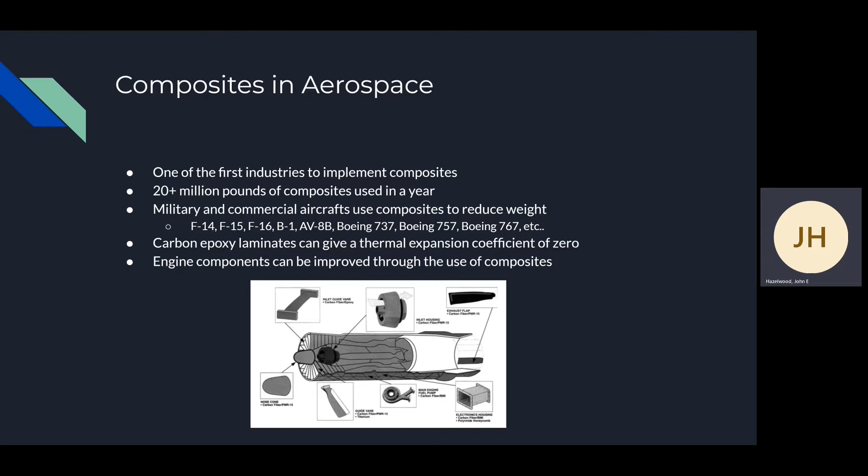So the performance requirements for aerospace parts include reducing the weight, improving the thermal and dimensional stability. So lower weights in these parts can reduce the lift necessary, so engines can be more fuel efficient and produce less emissions. Parts are also expected to withstand high temperature and pressure fluctuations, so high thermal stability is necessary. Additionally, high dimensional stability is necessary due to the conditions parts have to withstand. Improvements here can improve the reliability and safety of aircrafts.

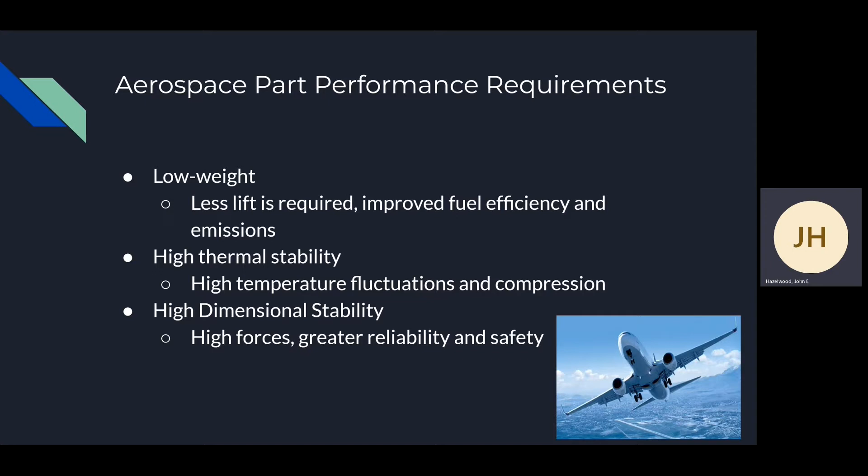The advantages of composites include making production easier, making it behave more consistently, and improving the strength to weight ratio. Parts manufactured for aerospace applications can often be complex and difficult to machine when working with metals, but manufacturing techniques available to the production of composites can make this much easier. Additionally, composites can be created to have a higher stiffness, which will produce way more consistent behavior in these parts, which is crucial in this industry. Finally, the improved strength to weight ratio gives aircrafts a much better fuel efficiency and reduced emissions.

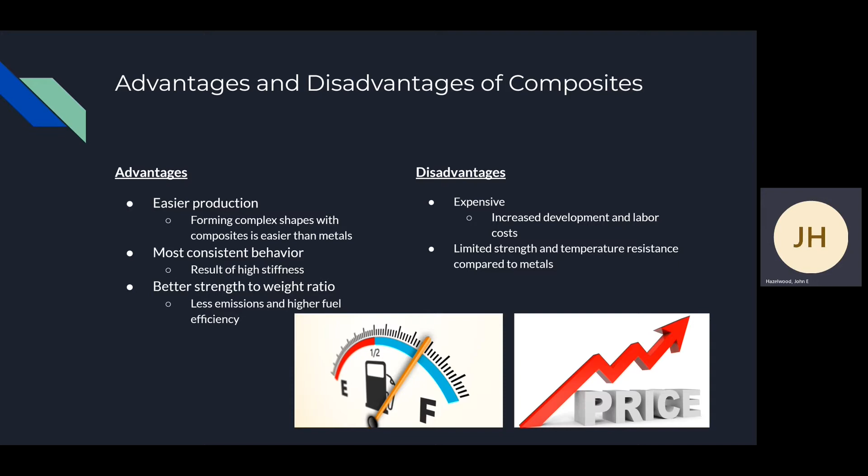On the other hand, however, composites can be more expensive and sometimes not perform as well as metals. Composites are generally more labor intensive, and for high performance parts, they can significantly increase the cost of manufacturing. Additionally, composites are unlikely to possess the same strength and temperature resistance that metals typically offer.

Ceramic matrix composites, often called CMCs, appear poised to be the next big development in jet engine materials. These materials are already in use in modern military engines, most notably in the exhaust nozzles of the F-135 on the F-35 Lightning II. Major manufacturers GE, Rolls-Royce, and Pratt & Whitney have all invested in research and manufacturing of these materials. CMCs provide great benefits and heat resistance relative to metal alloys, as well as weight, coming in at a third of the weight of most metals for the same part.

Without the need for air cooling paths within the engine and reduced rotating mass, as seen with GE's prototype CMC blades in the second image here, much more freedom is granted for aerodynamics and design to improve efficiency. Furthermore, these parts need less investment in tooling to lay up, helping maintain costs compared to alloy counterparts.

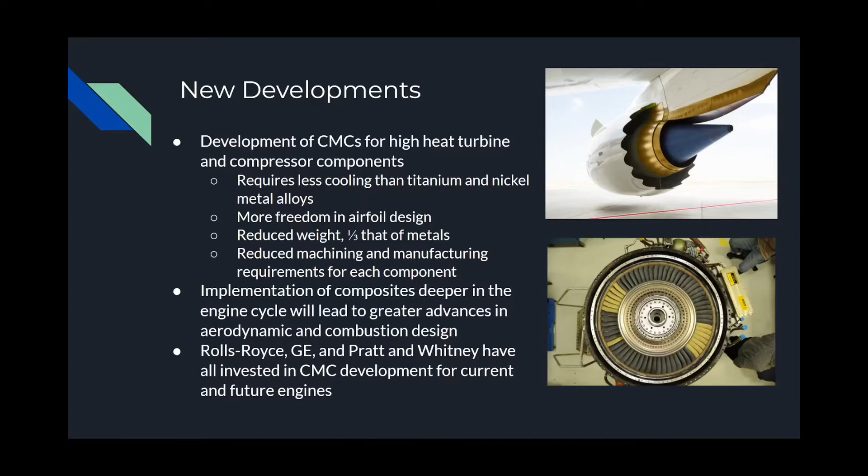New designs for composite aircraft engines are always in the works, and a few concepts that heavily leverage composites are discussed here. Rolls-Royce's UltraFan is a new generation of wide-body engine from the supplier. It will be their first to utilize composite fan blades, and it uses the greatly reduced mass, 370 kilograms per engine, and moment of inertia of these spinning blades to create the largest fan of any jet engine in the world. 140 inches in diameter is 6 inches larger than the GE 9X, which is GE's current largest engine in production.

Furthermore, as discussed previously, it uses extensive CMCs in its core to improve efficiency. Another new design concept comes from GE and Safran with their open fan engine. GE was the first to develop composite fan blades for a jet engine when it initially explored this concept in 1985, and it's seeking to bring back the design for modern materials to improve the efficiency as seen in initial testing. A 20% improvement in efficiency was seen with the original design, and GE aims to improve on this in its second iteration. As pictured here, this adds stators and a new rotor design to the already fleshed out open fan system that they've been looking at, all of which will be composite materials.

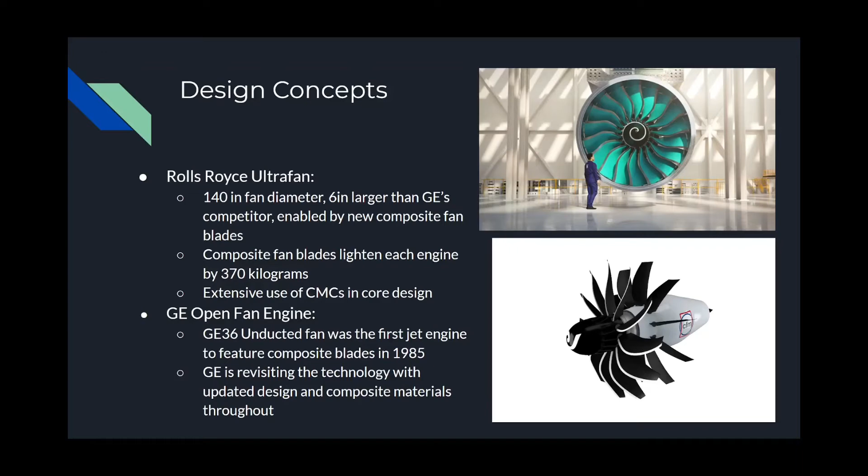The market for composite engines has been rapidly growing in the past few years, with nearly every new engine on the market featuring some use of composites throughout the design, and many making large composite components like fan blades a feature. This is because of the way the airline industry operates. Fuel costs are huge for carriers, and bringing down those fuel costs with lighter and more efficient engines is nearly always worth the added cost in procurement and maintenance. Fuel is always getting more expensive, so airlines will continue to seek these ever more efficient engines.

This is seen in the order numbers for the year, as every plane offered, sold, and delivered by current aircraft builders is powered by engines that heavily utilize composites in their designs. Looking at the list of orders for 2022 shown here, the most common aircraft we see are the 737 and A320. Both Neo variants use composite fan blades, as well as extensive composites in their casings and the engines that power those aircraft. So composite engines are really dominating the middle of the market with those two mid-size single-aisle planes.

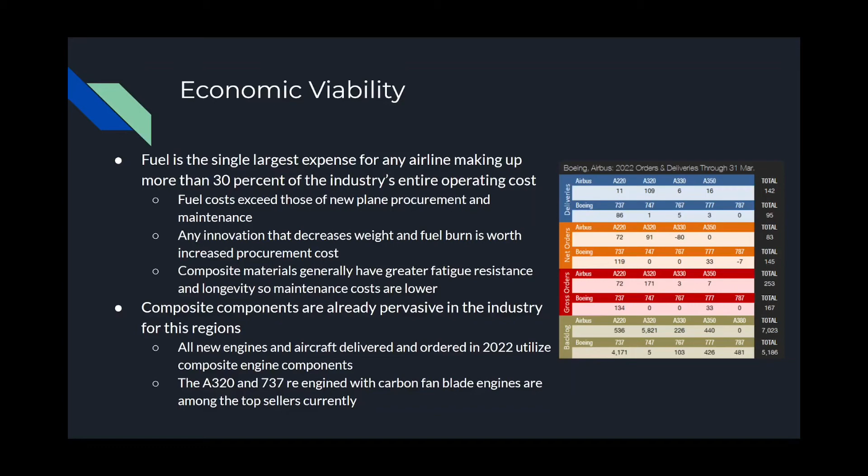Same with the A220, which uses composite blades and composite casings, and the 787 and A350 are pretty well known for their composites use in the industry. Such prevalent use in industry demonstrates the utility that these materials provide their customers, and this utility will continue to grow with greater composites development.

For raw materials, carbon fiber epoxy composites are by far the most commonly used engine composites because of their prevalence in nacelles, which benefit from the high strength and stiffness of carbon fiber. Fiberglass can be used as a low-cost option in parts with lower strength requirements, though this isn't as common in engines as in the rest of the aircraft because there are fewer non-structural parts. And in general, high performance is valued over low cost, which makes carbon fiber preferable to fiberglass.

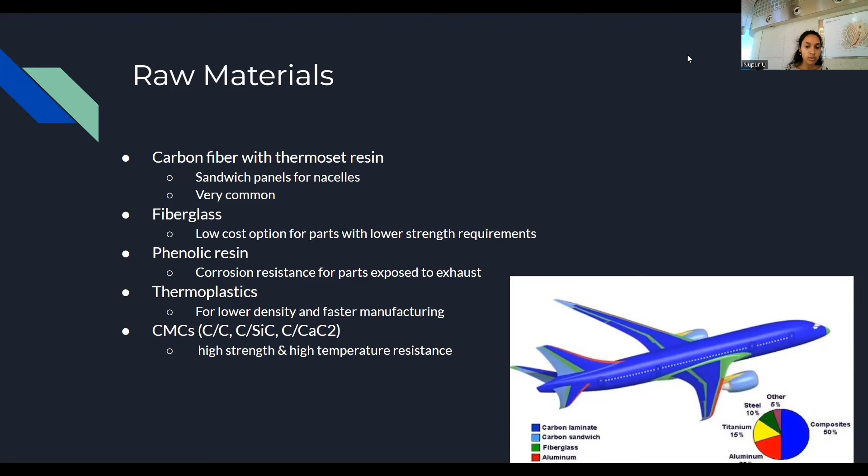Aircraft exhaust is very hot and corrosive, so phenolic resins can be used in exhaust nozzles and other parts exposed to exhaust because they have good corrosion resistance and can't really burn. Thermoplastics often have worse properties than thermosets, but are used because they provide lower density and faster manufacturing times than thermoset resins. And finally, we have ceramic matrix composites. Currently, the most common are carbon-carbon-based CMCs. These are a lot more difficult to manufacture than polymeric composites, and as a result are very expensive, but they can provide high strength and temperature resistance beyond what is seen in more typical epoxy-based composites.

Nozzles for lower service temperatures are typically carbon fiber composites and can thus be made with filament winding, which is one of the easiest ways of making hollow circular structures, in that either pre-preg tape or a wetted bundle of fibers is wound around a mandrel and then cured. For higher service temperatures, ceramic matrix composites are instead used and have completely different manufacturing processes. CMC processes depend on the thickness of your part and the composition of your reinforcing ceramic, among other things. Two common processes are hot press sintering and chemical vapor infiltration.

Hot press sintering is a good option for solid parts where the components of the composite can be solid state sintered, for example, alumina. However, this doesn't work with carbon. So in carbon-based CMCs, infiltration techniques are more often used, where the matrix is made and the second phase is introduced as a liquid or gas, which allows it to impregnate the matrix before being solidified.

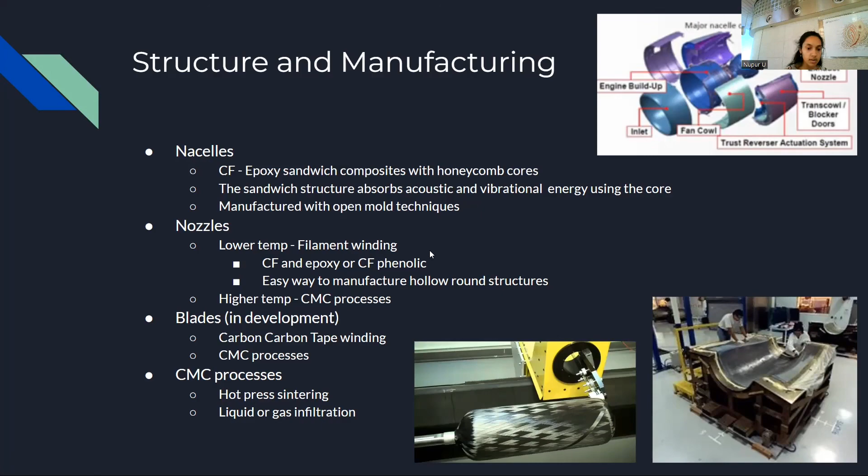Composite blades are not super common yet because their high performance requirements are not compatible with typical resins, and alternative manufacturing techniques are not well developed yet. One option is carbon-carbon laser-assisted tape winding, which is a modification of filament winding that is suitable to manufacture the more complex shapes seen in blades. And then again, you can use ceramic matrix composites.